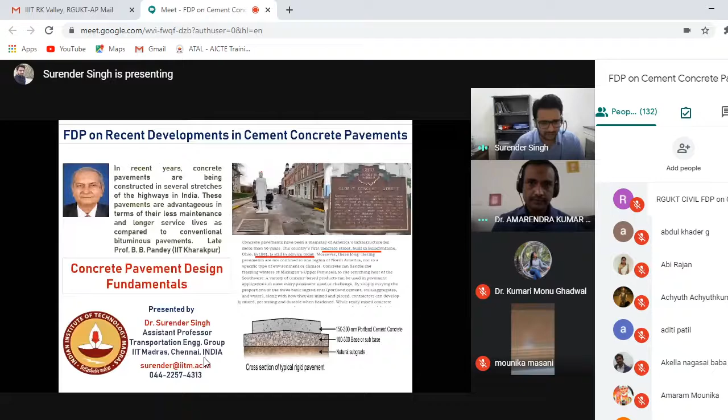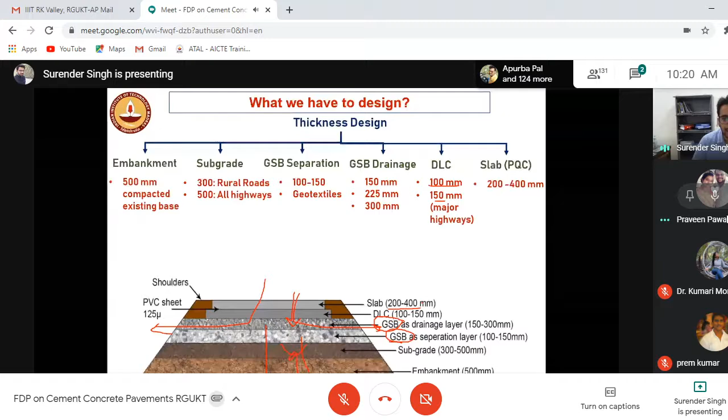Most of a cement concrete pavement, the thickness can vary from 20 to 40 centimeter. You should remember this is the thing you need to design very effectively. Although we need to design every different layer, it will definitely affect the economy of the project. So in a nutshell, the thickness of different layers of a concrete pavement, especially the embankment, subgrade, GSB, separation layer...

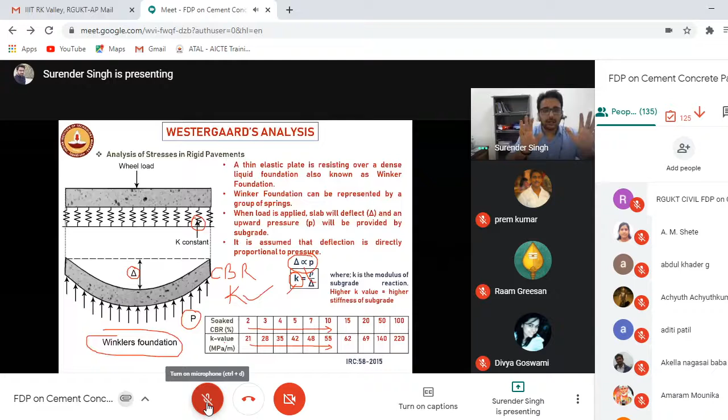This is the first analysis, mechanistic empirical analysis, wherein...

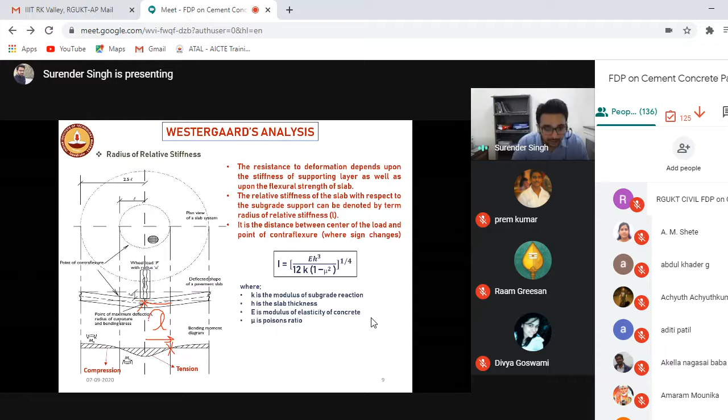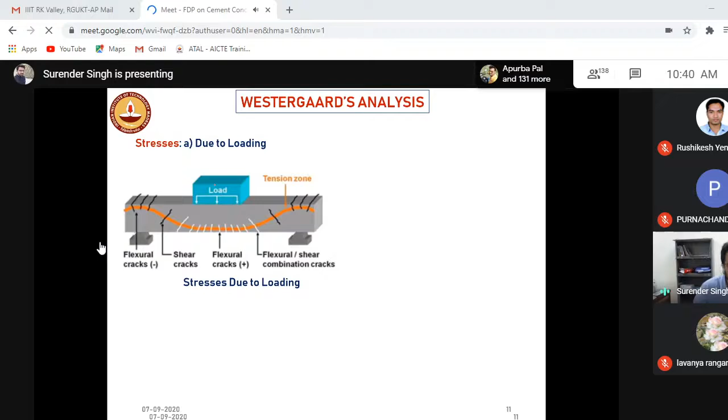Now, as far as loading is concerned, whenever I go to the classes, they will be considering that the concrete used for buildings as well as pavements are the same. No, the design is not the same. In case of buildings, you are designing based upon the loading. When you apply the loading, stresses will come, this portion will be in tension, this portion will be in compression. Concrete is weak in tension, so cracking will develop.

A similar thing will happen in case of the pavement, but also in pavement, stresses can happen when there is no load also, because of the frictional stresses.

Okay, so assume one condition that you have constructed your pavement on many rollers. Again, I think somebody started. Okay, go to the screen. Sir, no problem, as long as we pin you we could see your screen. Please continue sir, no problem sir. That's fine, yeah, okay. Bluetooth.

Okay, thank you. So let's assume that your pavement slab has been constructed over the rollers, there are many rollers. If you can see my hand, let's say if somebody is twisting my hand, there will be no stresses, because I'm not resisting towards this.

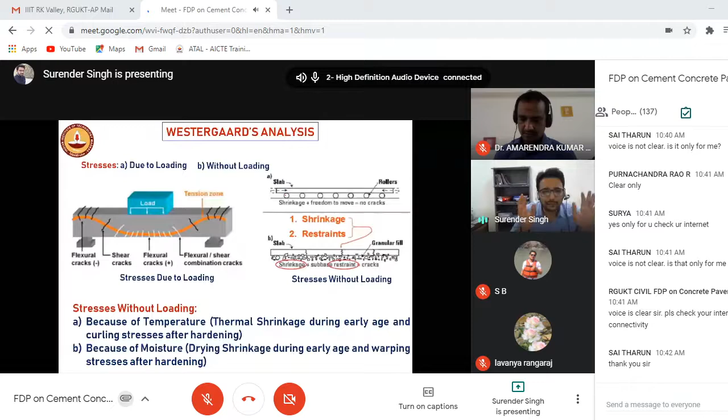It will be restricting this movement, so definitely there will be some stresses. Similarly, when the concrete wants to compress, if you allow it to compress, there will be no stresses. But in real conditions it doesn't happen, because the pavement is not constructed on rollers where it can simply compress. The pavement is constructed on subgrade, subbase, so if it is trying to compress, the below layers will try to resist that movement. Because of that, frictional stresses will come, and because of that cracking will develop. So without loading also, stresses can happen onto the concrete pavement.

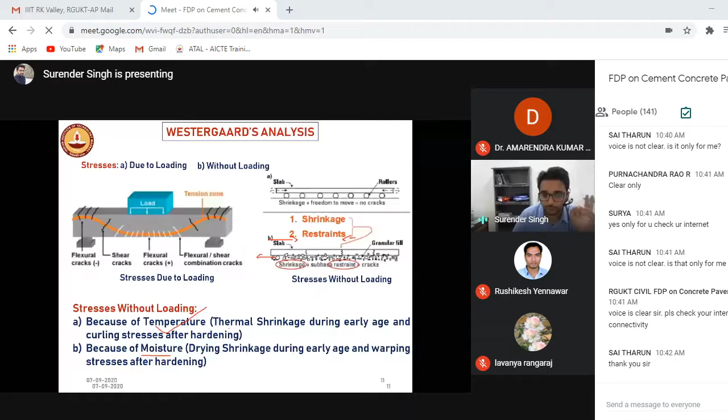These stresses are because of two things: one is temperature and the other is moisture. In case of temperature, we have two stresses, which we can broadly classify into thermal shrinkage and curling stresses after hardening. Similarly, because of moisture, we have drying shrinkage and warping. If you read many books, they will be confused between curling and warping. You should remember, curling happens because of temperature variation, and because of moisture, warping will happen.

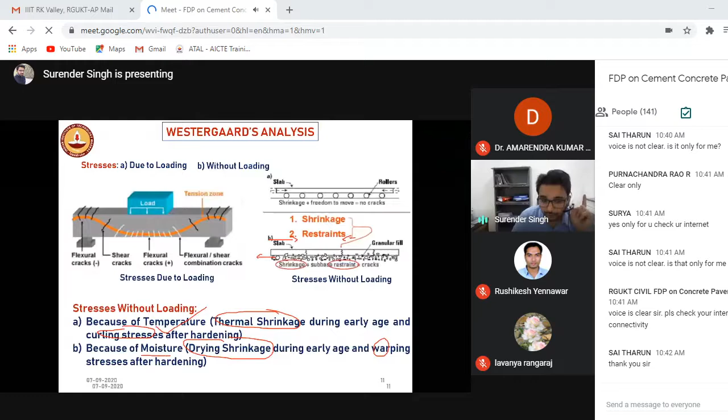Then Westergaard, when they did the analysis, constructed their structure model, distress model, validated these models, and came out with some equations, mechanistic equations. These are not empirical equations. Empirical means based upon some test track, based upon some field studies. Mechanistic empirical equations mean when you are constructing a model and validating it with the help of field trials, these equations are more reliable because they have been calibrated.

So for different loading conditions, they came out with different equations. You have to find out the stresses when your vehicle, of different loading P, is moving over a pavement with different thickness, and the radius of relative stiffness that we just discussed. You need to compute all the stresses, and these stresses should be less than the flexural strength of the concrete. Until your stresses coming because of different vehicles is less than the flexural strength of concrete, it will not fail. But if stresses are more than the strength of the concrete, it will fail. Similarly, for the temperature, there will be some stresses because of the curling, so they came out with different equations.

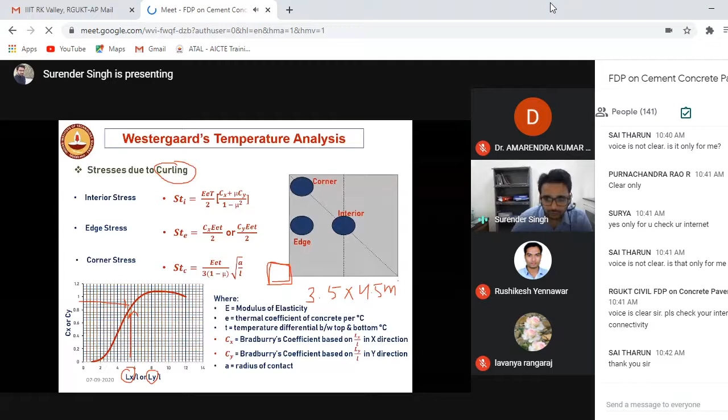Normally, in the case of the IRC, what we have considered is a width of 3.5 and a length of 4.5 meters. So all the equations are valid for a slab size of 3.5 into 4.5.

So how to compute the frictional stresses? Let's assume that this is a pavement slab. One more thing is that we are not constructing the pavements in different slabs. We will construct the pavement in a single go. After that, we'll be cutting some joints.

The fundamental behind cutting the joints is that if you are not cutting the joints, frictional stresses will come and cracks will happen at different, random locations. If cracks come at random locations, you cannot monitor it, you cannot maintain it. It will not be economical.

So for that, what we do is provide joints after constructing the pavement. Now if I provide a joint, what will happen? The concrete at this location will be less, the thickness of the pavement will be less. So obviously, this is the weak joint. So when the stresses come, the resistance to stresses at these locations will be less, and that's why cracking will happen at these joints.

So you have to maintain this. Now I know the cracks will be happening here, so I can take proper precautions. Anyway, this is not a part of today's presentation, it's about the joints, but I thought it will be good for the undergraduate students.

So let's say this is my pavement of length L, breadth B, and thickness H. If my concrete is trying to compress, let's say it's winters, my concrete slab will try to compress. You all will be compressing too in the winters. So what will happen? As we discussed, the concrete slab is prepared on the subgrade, so it will try to resist that movement. So there will be some frictional forces.

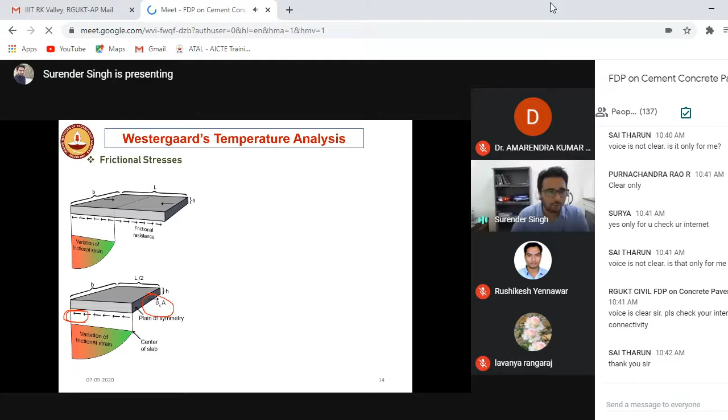You can simply relate it, assuming equilibrium conditions. First find out how many frictional forces will be coming - we can calculate the volume of the concrete multiplied by the frictional coefficient F, and the weight of the concrete slab will also be contributing. Higher the weight of the concrete slab, more will be the friction. Thinner slabs you are having, lesser will be the friction, and this much stress will be coming.

So you have to equate the frictional forces with the total tensile stress. A is the area, which is B into H. If you compute both things and relate it, you'll find that sigma, the stress occurring because of the friction, will be equal to the weight of the concrete, the length of the concrete, and the frictional forces that will be coming. So you can find out the frictional stresses.

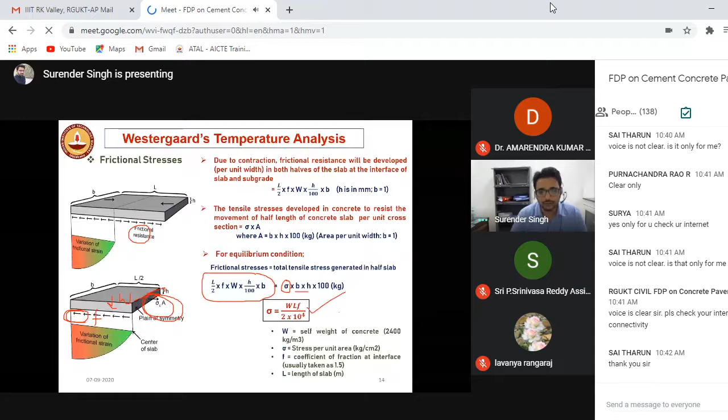Based upon that, you can design your tie bars. So as we discussed, the stresses because of loading and curling are always additive, but frictional stresses may or may not be critical depending upon the condition and the weather. Let's say it's summers - what will happen? Concrete will try to expand, but it will be restrained to do so by the subgrade. So what will happen?

If you see the sign here, it's compressive in nature, and we know concrete is good in compression. That's why you have to subtract the frictional forces. Suppose in winters, what will happen? The concrete will try to compress, right? But this movement will be resisted by the subgrade.

So what will happen? It will be in opposite direction. That means if you see the sign here, it's tensile in nature, and you know concrete is not good in tensile, right? So what will happen? These frictional forces will be additive in nature. And at the corners, because they are free to curl, no frictional stresses will be coming.

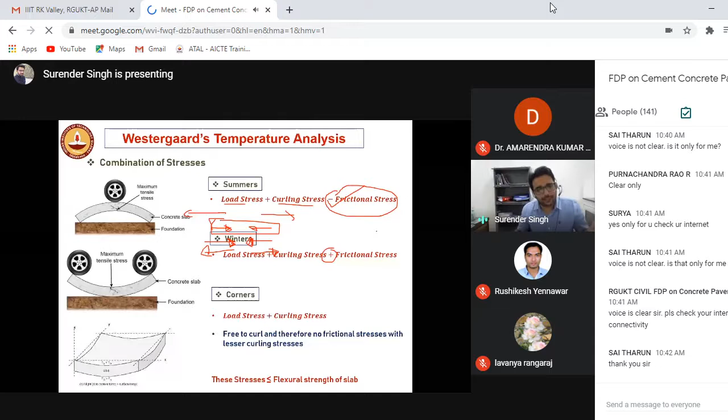But is it the real scenario? Because in a single day also, the temperature during the morning time will be different, at the night time will be lesser. Why are we considering only summers, winters? That means we need to consider the daily temperature variation.

So if you see here, in the daytime, the temperature differential in a pavement will be higher. So that means because of the temperature, the stresses in the pavement will be more during the daytime. At night time, the temperature differential in the pavement will be lesser. That means the stresses will be lesser.

However, as per Indian law, what will happen? We are not allowing heavy commercial vehicles during the daytime. So the commercial vehicles will be flowing at night time. So see here, during the daytime, the stresses because of the temperature will be more, but the stresses because of the loading will be lesser. At night time, the stresses because of temperature will be lesser, but because of loading, since all the trucks are flowing at night, they will be higher.

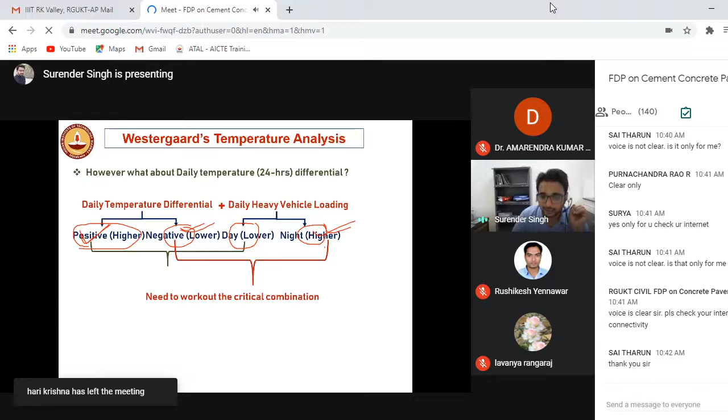So you need to work out the critical combination. So that has been taken care of in IRC 58 design, and they named it bottom-up cracking and top-down cracking. So now we understand what is bottom-up cracking.

Let's say it is morning time. You will be having a sun here, right? And you all know that when there is sun, you don't want to go towards the sun. Similarly, the concrete pavement slab tends to curl downwards because of the temperature differential.

So what will happen? Can it curl? No, it cannot curl, because the subgrade will be there, the dowel bar will be there, the tie bar will be there, the concrete pavement thickness will be there. It won't allow it to curl. So what will happen? The tensile stresses will be generated.

So let's say if it's trying to curl like this, the subgrade will be opposing it, the dowel bars will be opposing it, so it will try to send it back. So when it's trying to send it back, what will happen? The compression will be at the top and tensile will be at the bottom.

Similarly, what will happen at night time? The high temperature will be here, lower temperature will be here. So what will happen? Obviously the concrete slab will try to curl towards the lower side, but because of all these factors, it will be trying to resist that movement. So tensile stresses will be appearing at the top portion and compression will be at the bottom.

And concrete is not good in tension. And when the vehicle is coming at the same time, it will add up to these tensile stresses. So in the daytime, when vehicles are coming, tensile stresses will occur at the bottom portion and cracks will generate at the bottom. In due course of time, the cracks generated at the bottom will move upside. So these cracks are known as bottom-up cracking because they have been generated at the bottom.

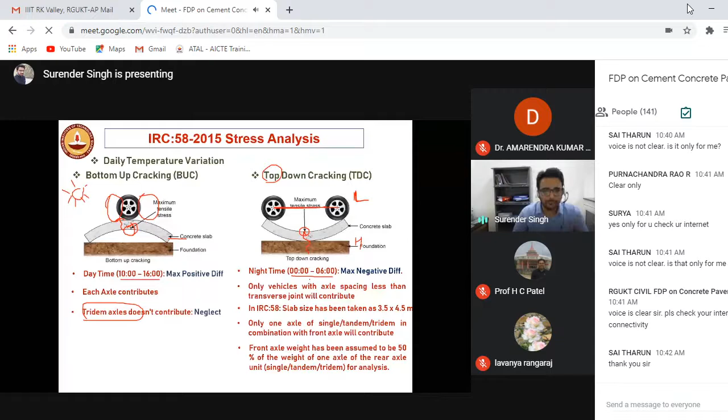Similarly, in top-down cracking, the morning duration, night 12 o'clock to morning 6 o'clock, the ambient air will be cooler but the temperature beneath the slab will be higher, so we need to consider this duration. Only those vehicles whose length is less than the length of the slab or the joints will contribute towards top-down cracking. These are some of the parameters considered in bottom-up and top-down cracking while forming IRC 58 design guidelines.

Now the question is, as Dr. Amarendra started with, our concrete is very good, very strong. So how does failure happen if the concrete is very good? Let's say this calculator represents the pavement, and this is the truck. When the truck is coming, will this have any problem? No, because the loading of the truck will be very less. So you can simulate with this. Then how do cracks come?

If I slightly increase the loading, nothing will happen if I beat it just one time. But if I keep on beating it, after some time there will be fatigue in the calculator, and a crack will be generated either at the top or bottom. If it's morning time, at the bottom; if it's night time, at the top. If I keep repeating it, the crack will propagate. That is known as fatigue crack, and because of fatigue cracking, pavement failure happens.

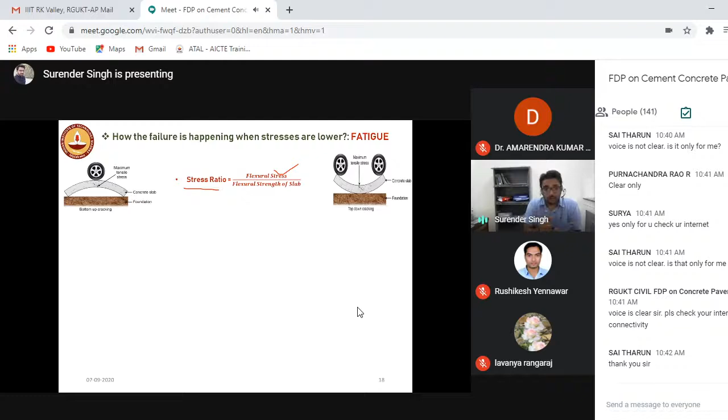So we need to compute the stress ratio, which is nothing but the stresses coming because of the truck, to the strength of the pavement. Now I have this stylish stick. If I keep some other thing, like a pen, which is very lightweight, obviously the flexure stresses will be very less compared to the strength of the slab, so there will be no failure. We did many analyses and found that because of the pen, you keep beating it, nothing happens. But if you increase the stresses slightly, or replace the pen with this heavy stick, then cracking can happen.

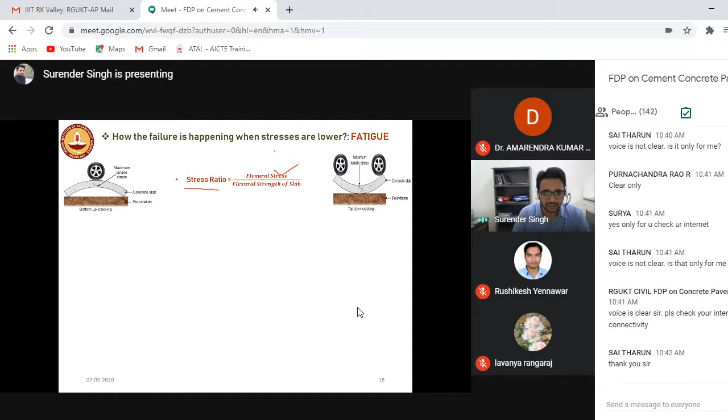But now you should come out with some numbers, so we came out with some numbers and represented it in terms of the stress ratio. What we found is that when the stress in the pavement because of temperature or loading, as a ratio to the strength of the slab, is less than 0.45 - meaning, let's say the flexure stress is 1 because of combined temperature and loading action, and the strength of the pavement is 3, so the ratio is less than 33% - that means no cracking will happen, and the pavement can sustain infinite repetitions of a single load.

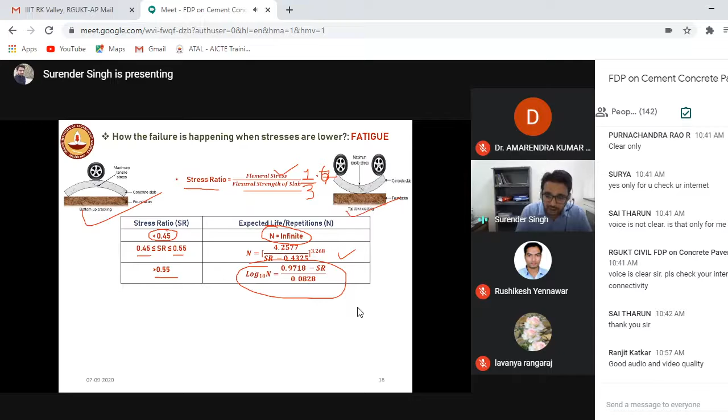However, if the stress ratio is between 0.45 to 0.55, there will be one time when the pavement will fail, which you can compute with this model. And when the stress by flexure strength of the slab is more than 0.55 - meaning if your stresses because of temperature and loading is 1.6 or 1.7 - then the life of the pavement will be decreasing. So you have to compute all these stress ratios for different conditions, for bottom-up cracking, top-down cracking, and different axles, and then compute the life of the pavement. We call it fatigue damage - the expected repetitions of a particular load for all axles, divided by how many repetitions the pavement can sustain before failure.

Okay, and that is fatigue damage. So obviously my fatigue damage for the morning time as well as the night time should be less than 1, because if it is 1, that means the repetitions are exactly the same as what my pavement can sustain. That means failure will happen.

So when your fatigue damage is more than 1, you have 3 choices. One is reduce the temperature differential, but you cannot play with nature. Or you reduce the loading. But how can you reduce the loading? Nothing you can do, right?

So what is the single thing we are left with? Increase the strength of the slab. How can we increase the strength of the slab? Because we don't have anything to reduce the stresses, how do we increase the strength? Either you increase the thickness of the pavement, but it's not an economical thing. Then what can we use?

We can increase the grade of the concrete, which we'll discuss in the second presentation. Grade means if I have M30 concrete, you can increase to M40, M50. So my strength of the concrete will be increasing, the stress ratio will be dropping, and simultaneously my damage will be reduced below 1. So this is the basic design fundamentals of IRC 58.

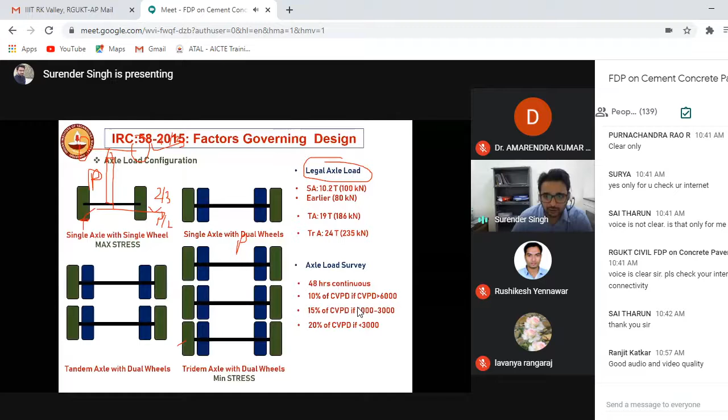So in India, if you go on the highway, there will be some challans - we have some legal axle load. For single axle, the legal axle load is 10.2 ton. Recently - not recently, 2 years back - the government increased this loading also, I'm not sure about the exact figures, to around 11.5. Then for tandem axle, because there are two axles, we can increase the loading to 19 ton, and for tridem axle, we further increase the loading.

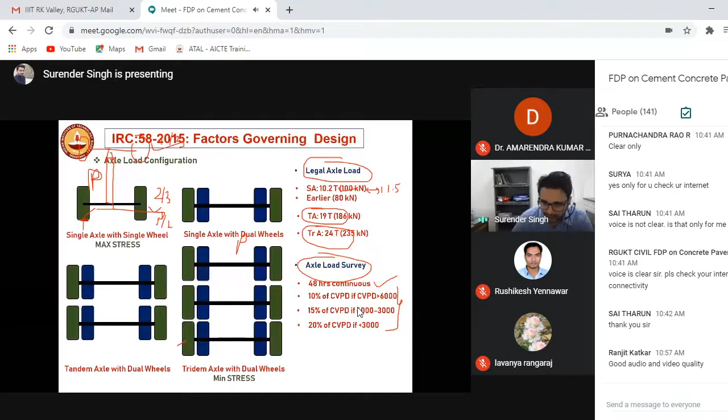So when somebody comes to you and says we need to design a new pavement, you need to map all these axles along with the loading. For that you need to do an axle load survey for 48 hours continuously, and based upon the number of commercial vehicles per day, you have to decide the sampling size.

Now the other governing parameter is the contact pressure. What we heard in the newspaper was that on Yamuna Expressway, tire burst cases were reported - accidents were reported because of the tires. They said because there is a concrete pavement, concrete pavement is the culprit there. But no, it was the contact pressure.

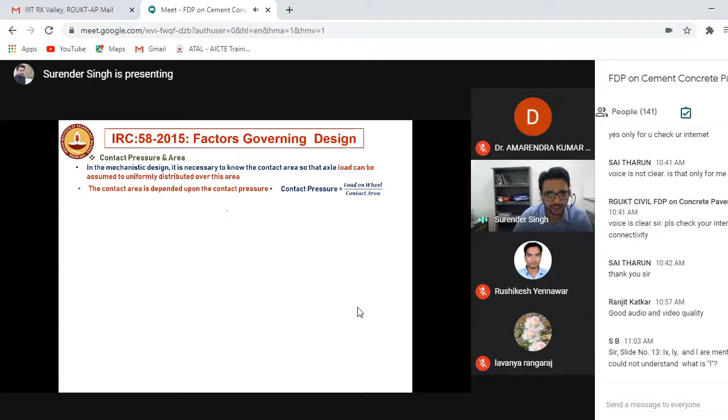So let's discuss how. If your tire pressure inside the tire is lesser, what will happen? Your tires will be in compression, your contact area will be more. If your contact area is more, the pressure onto the concrete will be more.

But now you say stress is equal to load upon area. So if I have more area, the stresses should be lesser. But here your tires are also in compression, right? And moreover, because the load is distributed, the stresses will be lesser, right?

It's a common thing. Let's say we have this condition where you had more pressure in your tire. So what will happen? If you see the length of the tire, the original diameter will be increased because the walls will be in tension. Then the pressure onto the pavement will be lesser. It doesn't mean you increase your tire pressure up

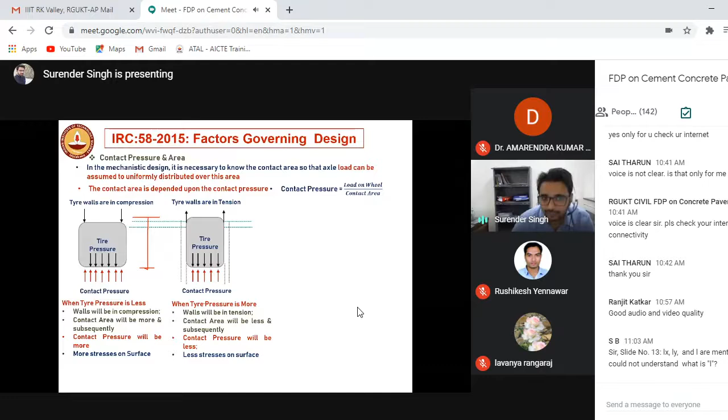to significantly larger. Why? This is the photo. If you see here, when you have lesser pressure in your tire, so what will happen? The shape of your tire will be like this. So all the loading that is coming will be distributed on the two sides, because this is not in contact.

But when I have overinflated, so what will happen? My shape will be like this. So the entire pressure will be distributed here, right? And if I have optimum inflation pressure in the tire, the load can be distributed evenly. That means we need to keep the pressure in our tires to the optimum amount.

If it is lesser than that, there will be more wear and tear of your tire. If it is more than that, like usually truck drivers do, because they know if you keep more tire pressure, then the wear and tear of the tires will be lesser. And there will be tension in your tire walls, so when they weigh it, lesser pressure will be coming.

So in IRC 58, what we have considered—because obviously we need to consider the worst scenario, it should be on the conservative side—we considered the tire pressure as 0.8, which is higher. So we have considered this thing.

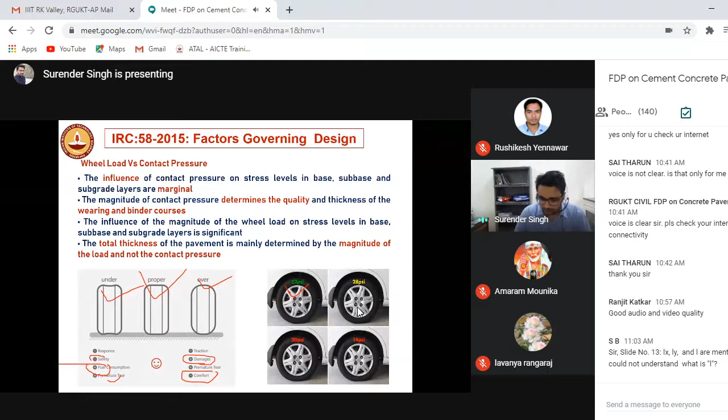So generally we are keeping, based upon whether the rear side or the front side, 30 to 40 psi is considered to be good. So the remaining aspects of IRC 58 we are designing for 30 years.

That means if, let's say, in the present case two vehicles are coming, we have to predict how many vehicles will be coming in 30 years. So if we can predict it in 30 years, that means we need to consider this much of traffic, because we are designing here for fatigue, meaning repetitions.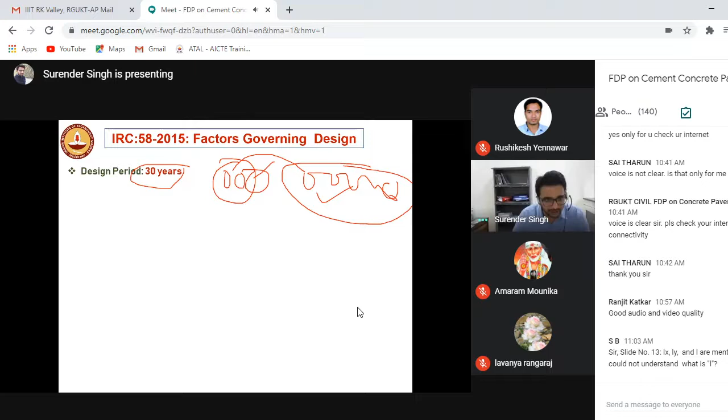So we need to consider this thing. If we are considering only two years, what will happen? Once the third year comes, damage will be there. Right? So we need to design for 30 years. But how to design it for 30 years? How to know how many vehicles will be coming after 30 years?

So simple bank formula, okay, compound interest formula. For that we need to have an R value. So the R value generally lies between 5 to 7.5%. But nowadays, because of the new axle load, multi-axle vehicles are more.

So if you have single axle, which is the culprit, and tandem and tridem axles, for each scenario the R value can be different. You need to map it. If you cannot, IRC 58 gives you a liberty that you can assume a value of between 5 to 7.5%.

And we know that we are designing the pavement by considering that the worst condition will be when the vehicle is flowing at a distance of 150 mm from the edges, right? 150 mm from the edges. So how many vehicles will be flowing at the edges? Simply what we can do, when the pavement is two-lane, two-way, meaning vehicles are going in this direction and coming from this direction.

Okay, so we can divide it into 4 parts, this part and this part. So we can say the total vehicles coming in both directions, you multiply it by 25%, and for that you need to design. Now one of my students asked, sir, why can't we design for 100% of vehicles? I said, yeah, if you have more money, you can design it. As a highway engineer, as a highway designer, we should be conservative, but we should also think about the economy.

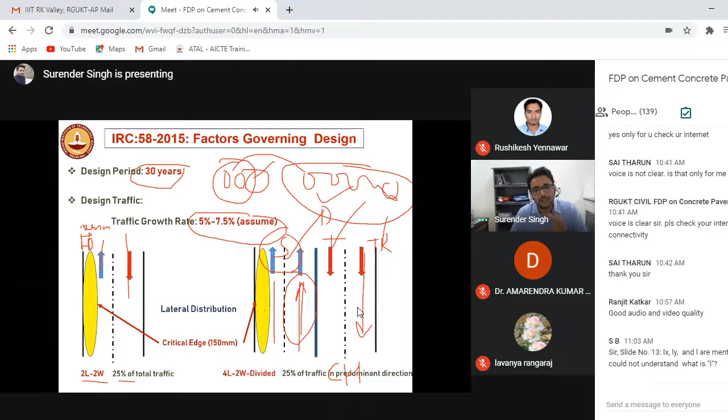So what happens if I have 8 lanes, or we can say 4 lanes and two-way divided highway? Obviously, we need to map the vehicles in both directions, and we have to see which direction more vehicles are going. Let's say this is your Chandigarh, and this is your Delhi. Obviously, if more vehicles will be going to Delhi than Chandigarh, what do we do? You have to consider this traffic. And then again, same formula: divide it into 4 parts and consider 25% of all the vehicles in a single, predominant direction, and consider it for the design.

So now, like we discussed, in the daytime there will be positive temperature differential, and in night time there will be negative temperature differential, as we discussed. Now the question is, if all the traffic conditions are same, everything is same, truck is flowing in, let's say, Uttarakhand, and the same vehicle is coming to Tamil Nadu or Andhra Pradesh. Everything is same, so that means the thickness should also be same? No, thickness will not be same. This is because of different temperature differential. And if there is temperature differential, we know the stresses are not because of the loading but because of the temperature.

So if the temperature differential is more, meaning the temperature at top and bottom, if it is more, the stresses will be more, so a thicker pavement slab will be required. So if I have to construct one pavement for all similar conditions except for the location, the pavements constructed in the northern part will be requiring lesser pavement thickness as compared to coastal areas like Andhra Pradesh and Tamil Nadu. This is because of the difference in temperature differential.

So if there are some research scholars here, we have a research idea: this table was constructed in 1974 and we are still using the same values. There has been significant advancement in the quality of concrete because of global warming. There will be significant advancements, or effects, on the temperature differential. So you can do this study.

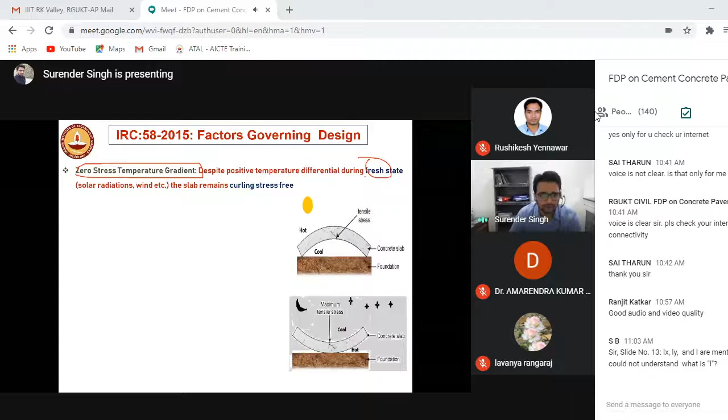So the other factor considered in IRC 58 is zero stress temperature gradient. That means because of temperature there are no stresses. When can it happen? Obviously when the concrete is in the fresh state, there will be no stresses. This is of no use, but permanent curling is a factor that you have to consider.

Permanent curling means, remember, in the daytime the shape was like this, right? In the nighttime the shape of the slab was like this because it was the cooler portion. It will go towards the cooler portion. But in the daytime also, the pavement can curl in this portion.

How? Say I have just poured my concrete and there is sun. So what will happen? There is zero stress temperature gradient, entire pavement will be having same stresses. But because of the loss of moisture from the surface, concrete will try to shrink. And when the concrete is trying to shrink, the shape will be like this.

That's why we need to cover the pavement just after construction, because we start curing after 1 day, but before that, if the temperature is more than 30 degrees Celsius, cover it, else the pavement will be like this. Now you say, if my pavement shape is permanent like this, that means in the daytime when it's trying to curl downwards, it has to overcome this shape, right? So will it be advantageous?

Yes, you are correct, it will be advantageous, because if my shape is like this, and after construction if it's trying to go downwards, it will go lesser because it's already curled upwards, right? Yeah, you are right. But in the night time, I know my pavement will be curling upside, and once it's already curled, that means more curling will be there.

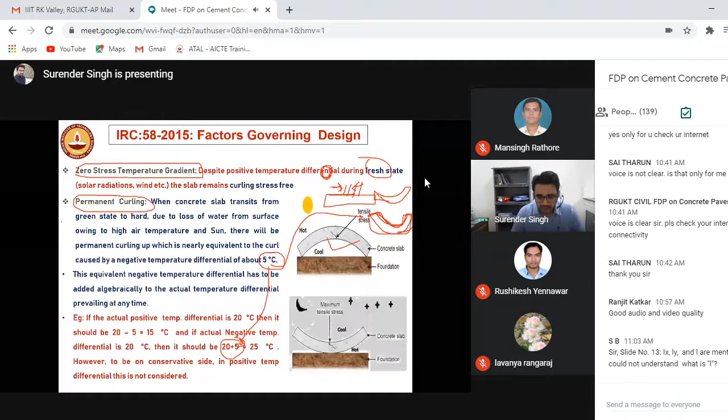But at night time, you need to add this 5 degrees Celsius. So when Professor K.S. Reddy will be teaching, you should remember that we are adding 5 degrees Celsius to take into account this permanent curling. Okay, now the important question.

We did something on the laptop, we made some formulas. Then how to do it in the real scenario? For structure modeling, I have considered only a thin elastic plate, or you can say PQC, and your subgrade. But in real life, you are having subgrade, subbase, DLC. How can I relate it?

So what you have to do is follow some methodology. Can't I convert... I know the entire subgrade is represented by a K value. So what I have to do is convert the entire lower layers into a single K value. We can do it. How? We'll be taking it up.

First, we have to club the embankment and subgrade together, then club that with GSB, then club all of that with DLC, and you can come out with a K value. Calculate a K value for this, let's say K1. Calculate the K value considering GSB, let's say K2, and then add K1, K2 with the K value of DLC, you will get a combined K value. How to do it? We'll see.

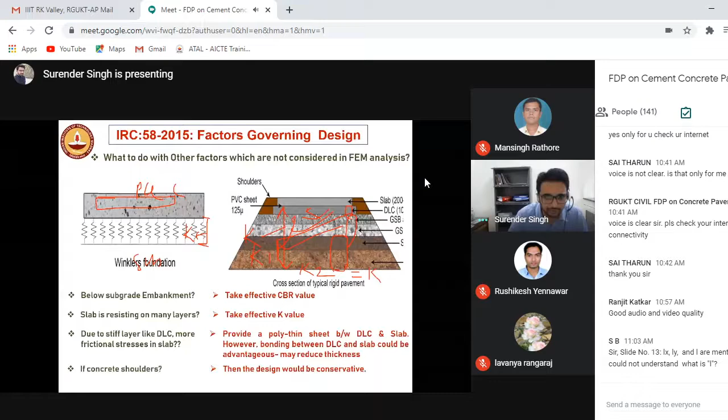Now clubbing the subgrade with the embankment. Remember subgrade, let's say you know the CBR value, right? I need 8% CBR for the subgrade. No, it's not for the subgrade, it is for the effective K value. Let's say I have a soil having a CBR value of 50, but the embankment CBR is 1.5. So what will happen? The combined CBR value will only be 10%.

So you are having a subgrade of good quality, you have added cement in it, and you are saying that CBR is very good. No, it also depends upon the CBR value of your embankment. So you have to take... we have the value, right?

Now you have to predict the K value as we discussed in the initial slides. With the help of this CBR value, you can find the value of K using the table given in IRC 58. So now we have clubbed the embankment and subgrade together with the help of this chart, and predicted the K value corresponding to the combined CBR of subgrade and embankment.

Now after that I'll be having the GSB, the subbase. You already have the K value of the subgrade, and if you know the thickness of your granular subbase, you can use these relations, these charts, and come out with a K value. We'll be solving one numerical.

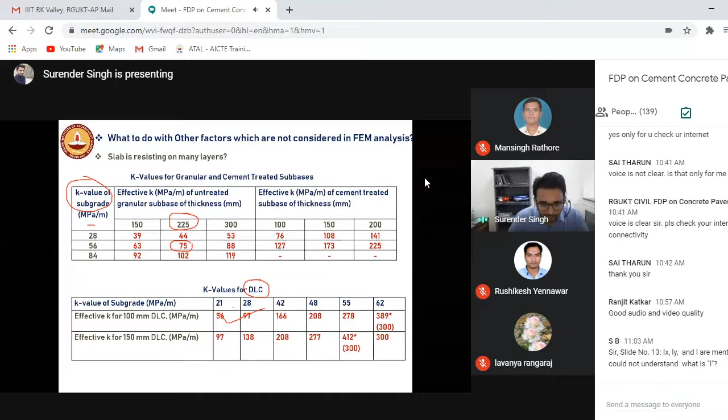Then after that we have the DLC. This table you can use for relating the K value of other layers for the DLC. That's how you can club them. So these are the design steps. I am not touching the design steps because in 10 or 15 minutes we cannot complete them, so Professor K.S. Reddy will be covering this portion.

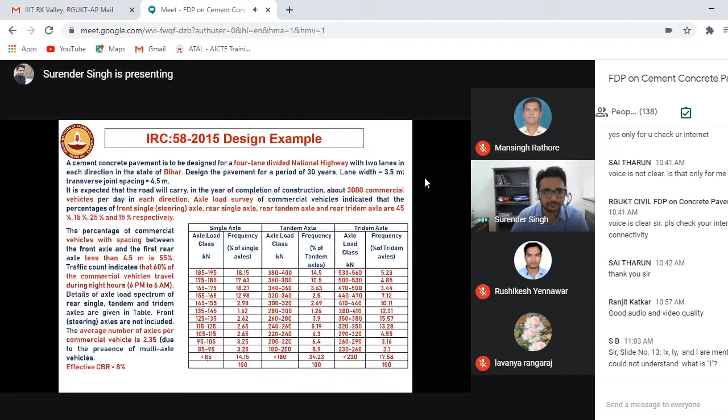Let's say we take an example that a new pavement is to be constructed for a national highway. Once you hear this, that means DLC should be 150 mm, right? And subgrade should be 500 mm. So you have to now calculate the thickness for your pavement quality concrete, and you have to use many layers because it's a national highway, right?

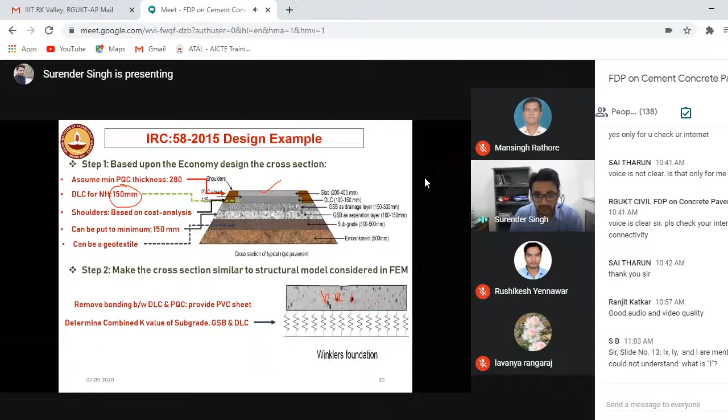But in a structure model, you have PQC sitting over a subgrade. So now convert all these things into a single K value. How to do it? As I said, we know the CBR value of the subgrade. Predict the K value.

Let's say we have 8% CBR, which is recommended by the IRC, so you have to do the interpolation. You will be getting a K value of 50 corresponding to a CBR of 8%. Now you are providing the granular subbase of 150 mm, and this K value for this subgrade is 50, so it will be lying in between 28 and 56.

Simply interpolate and you get a K value. Now, after GSB you have DLC, so you have to club them together.

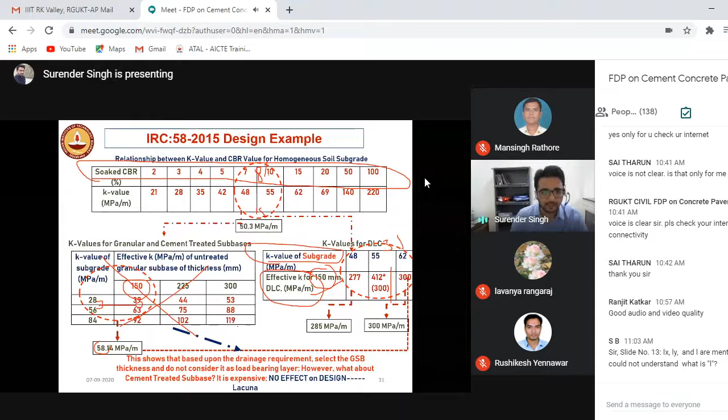Because it's a national highway, you provide a DLC of 150 mm and the K value is 58. Interpolate it and it comes to 300. But listen carefully: once you provide the DLC, the K value contribution from the subbase will not be there. When you're not providing DLC, you have to follow these steps, because the table says the K value of the subgrade affects the effective K value when providing DLC. This is one of the lacunas in the present code—if someone wants to do research, vary these parameters and see what happens.

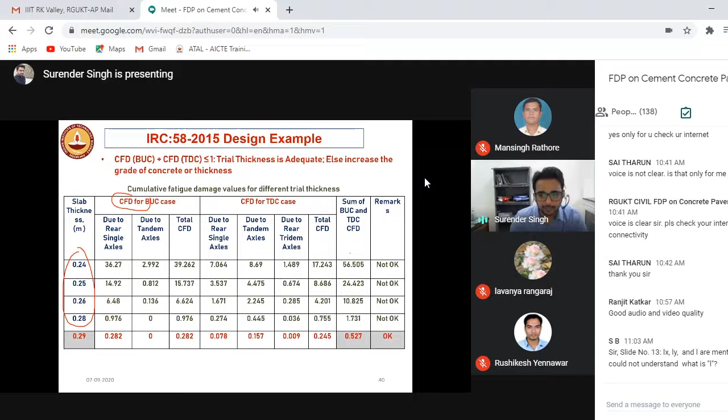These are other steps I'm not going to touch, but I can show you something. You have to do fatigue damage analysis for different pavement thicknesses, and as discussed, the sum of fatigue damage for bottom-up and top-down cracking should be less than 1. If more than 1, increase the grade of concrete or the thickness. So I started with 24 centimeter thickness.

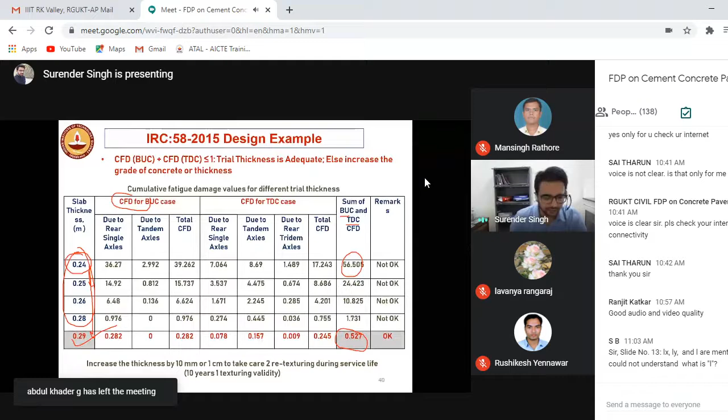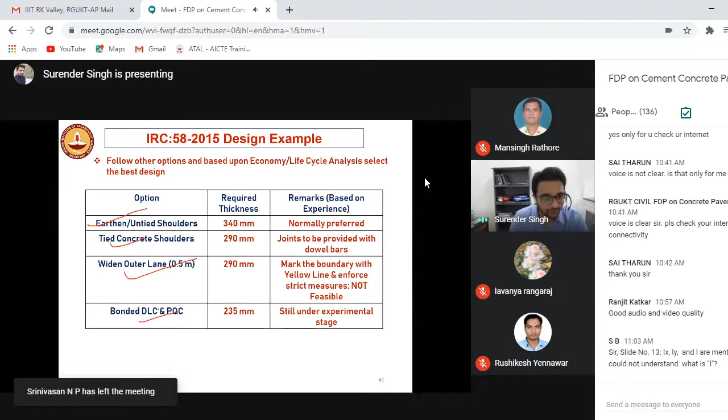The fatigue damage came out to be more than 50. Then I increased the thickness up to a point where fatigue damage is less than 1—that thickness is the safe thickness. You have to increase it by 1 centimeter to provide texturing. IRC 58 gives you liberty to do many trials: earthen shoulders, tied concrete shoulders, widened outer lane. You can even have bonding between PQC and DLC, but that's still at the experimental stage.

This is one of the things considered in IRC 58, and we published a paper in IRC on it. We changed the CBR of the subgrade, changed the thickness of the subbase, and changed the type of subbase—from granular subbase to cement-treated subbase to dry lean concrete subbase. For all conditions, the trial thickness came out to be 31 centimeters only, for this particular case.

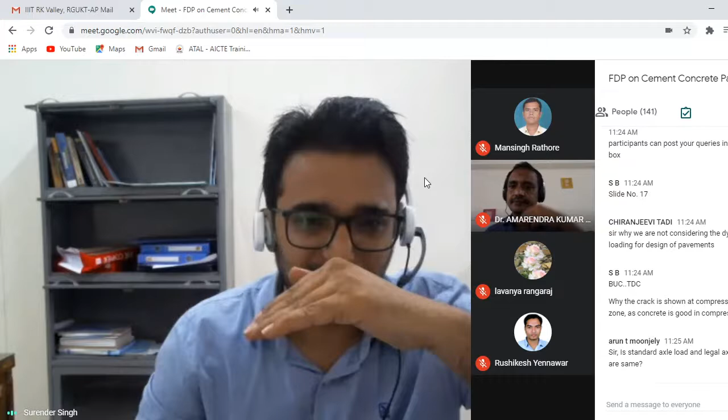Why is the crack shown in the compression zone, as concrete is good in compression? As I told, let's say in daytime my slab will be like this, but it cannot curl in a downward direction in the daytime; some forces will be restricting it. So when it's trying to curl, this is not the actual shape, the pavement will be like this only, but for representative purposes I showed it like this. So my pavement will try to curl downwards, but the resistance from the subgrade will push it upwards from this side. So the signs will be changing. Earlier the sign should be compressive and tension here, but because of the resistance, the compression will be here and tension will be here.

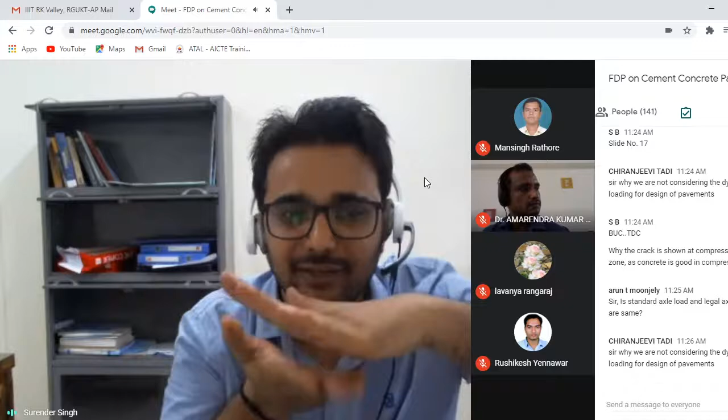Is standard axle load and legal axle load the same? Yeah, both are same. Why are we not considering dynamic loading? I already replied that the static loading condition is for the conservative side; we are designing for the worst scenario.

Do we consider the IRC loading for design of rigid pavement? Yes, you can consider it. But what happens now is these guidelines came in 2015, so we have to strictly adhere to the guidelines if it is written in the tender. If it is not written in the tender, then you can adopt the actual loading conditions.

What is the equivalent radius of the resisting section? If my pavement is deflecting, the thickness, length, and width of the pavement will be resisting that deflection. So how much area is resisting that deformation is known as the radius of the equivalent resisting section, because we are considering that the tire imprint is circular for simplicity. That's why we call it the radius of equivalent resisting section.

In some cases, rigid pavement is laid over WBM, but not on PQC. Why so? PQC is rigid pavement only. PQC and concrete pavement are the same, but when your concrete strength is more than M40 and the slump value is around 25 to 40 mm, that concrete is called pavement quality concrete. It's a mixture; the name has been given to that medium strength, or you can say normal strength concrete matrix.